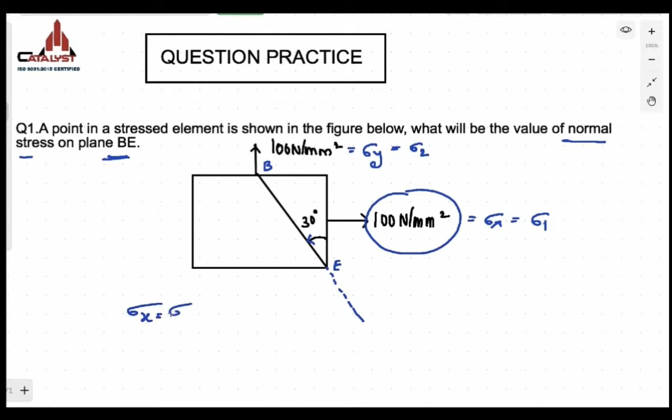Plus 100 minus 100 is 0, so you will get this value is 100 Newton per mm square. If it comes positive, then this is tensile in nature. So normal stress on this particular plane will be 100 Newton per mm square.

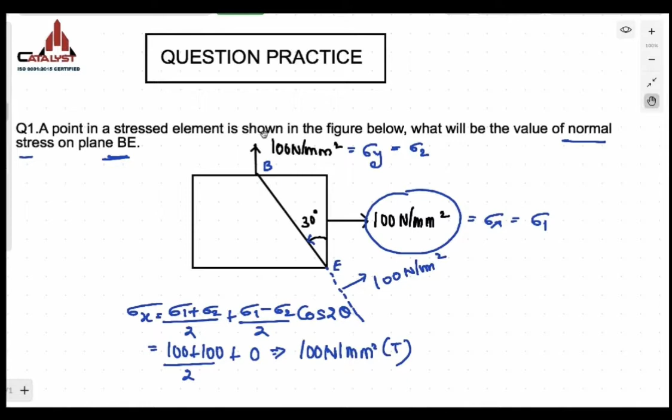Fine. First check the plane which is given, what the plane is. If it is having shear stresses then that will be the general plane, the concept we saw. Otherwise it will be the principal plane. In the principal plane, sigma 1 and sigma 2 you have to consider directly.

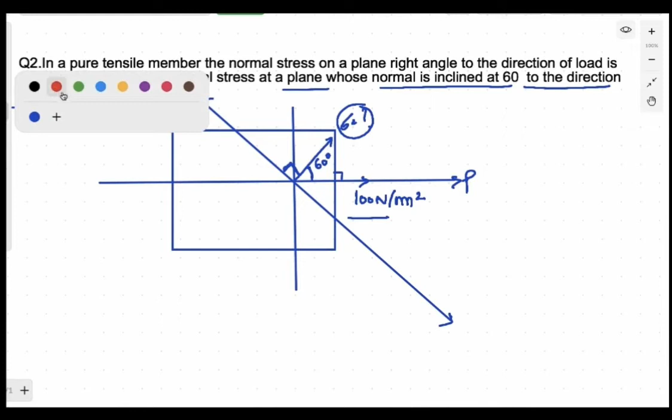पहले what they are saying is that this is the plane which is 90 degree with the direction of the load and the stress is this much. Now what they are saying is that you have to calculate the value of stress on that plane at which the normal, this is the normal, ये plane मैंने consider कर लिया. इस plane का normal मतलब इस plane से 90 डिग्री, this is the normal. इस normal stress की वैल्यू को निकालना है जो डायरेक्शन ऑफ लोडिंग से 60 डिग्री पे इंक्लाइन है. ध्यान रखना, if this angle is 60 degree, with a simple geometry, this angle is 30, this angle will also be 60 degree. तो you have to calculate the value of this.

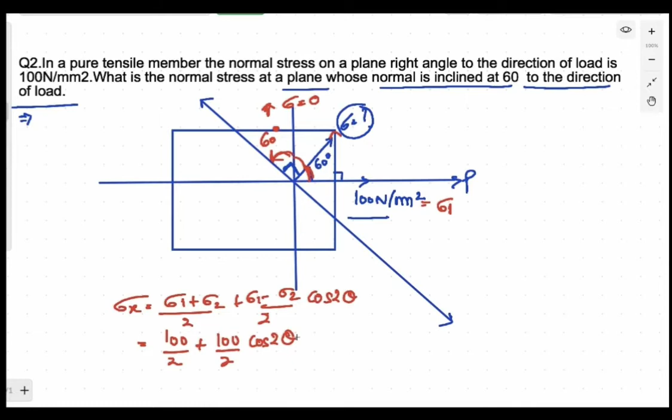Sigma x is equal to sigma 1 plus sigma 2 by 2 plus sigma 1 minus sigma 2 by 2 cos 2 theta, यही बनता है। Sigma 1 plus sigma 2 by 2 मतलब sigma 1 is 100 upon 2 which is 50, plus sigma 1 minus sigma 2 by 2, 100 upon 2, it is 50 cos 2 theta. This will be the value. It means that you can calculate this value. This is 50 plus 50 cos 120.

I guess you can understand what I am trying to make you understand. You have to calculate the value of normal stress on the plane which is like this. The normal stress is at an angle of 60 degree with the given loading system. So this is 60. It means that this will also be 60, which is anti-clockwise direction. So you can directly apply the relation and you can get the value of the stress. तो वो मिल जाएगा हमें। ठीक है। Now let's proceed to the next question.

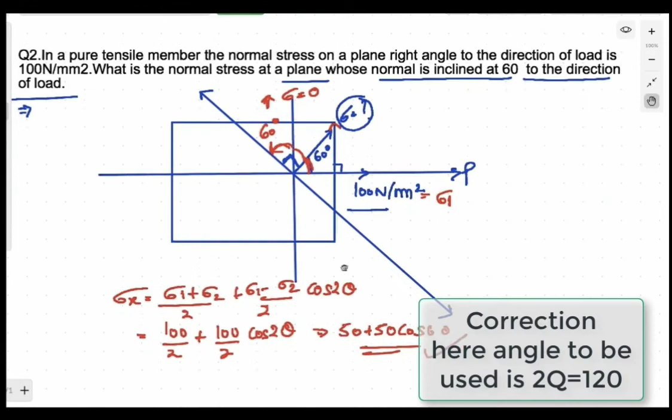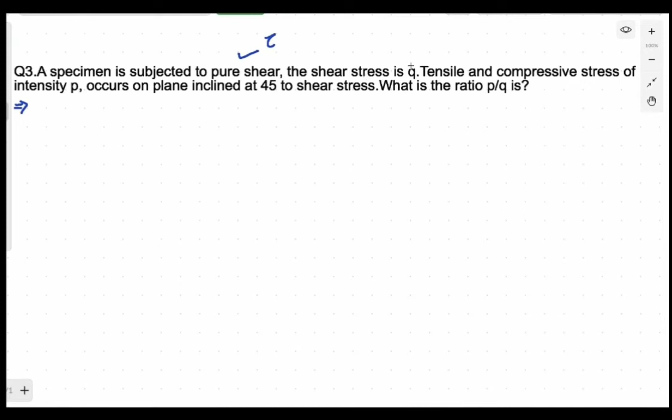Next question. A specimen is subjected to pure shear. Pure shear इसका मतलब only tau will be present. And a shear stress is this. Tau की जगह उन्होंने हमें Q दे दिया है, तो we have to consider it to be Q because in the question they are saying Q. The tensile and compressive stress is this. ये मुझे सिग्मा को P बोला हुआ है. Occurs on a plane 45 degree to the shear stress.

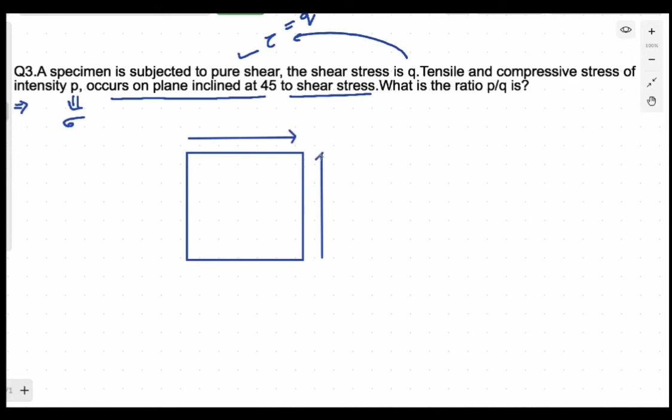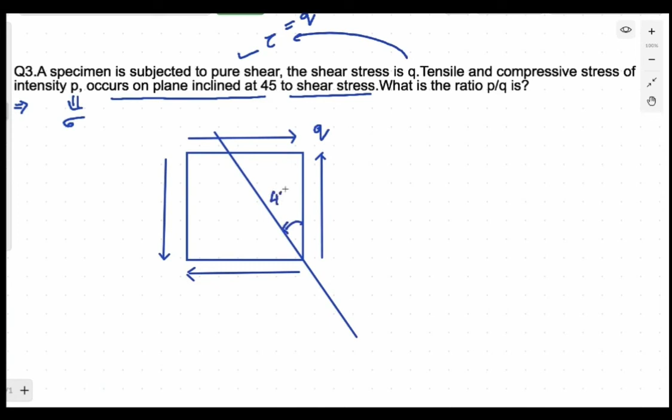It means that you have a plane of pure shear in which the only shear stress will be present like this. हम जानते हैं shear stress convention. The shear stress will be present like this, and the value of shear stress they have provided us to be Q. They are saying that 45 degree पे एक और plane जाता है. You have to calculate the ratio of P by Q. Say that this is the 45 degree plane, and on this 45 degree plane the normal stress is having intensity of P. This is what they are saying.

Now this P is basically equal to sigma x, इसमें कुछ वैल्यू ही नहीं है. मैं आपको यहाँ ऐसे करके समझा देता हूँ. On this plane the normal stress is sigma x which is equal to 0. The normal stress here is sigma y which is also equal to 0, and this is tau xy. This is the general case. We have to find the value of normal stress on the plane. This is sigma x dash, similarly sigma y dash and tau x dash y dash. We have to calculate sigma x dash.

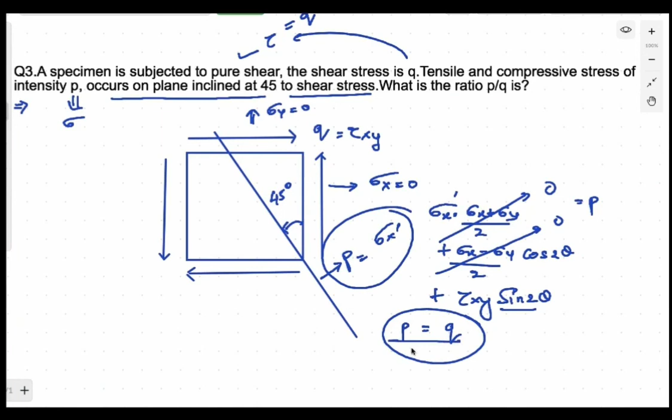This is equal to sigma x plus sigma y divided by 2 plus sigma x minus sigma y divided by 2 cos 2 theta plus tau xy sin 2 theta. There is no sigma x, no sigma y, so the result will be only tau xy. Tau xy is Q. So this is Q sin 2 theta, matlab sin 90, which is equal to 1. So P is equal to Q, because sigma x dash is the normal stress on the plane inclined at 45 degree. It means that P is equal to Q, and the ratio P by Q will be 1:1.